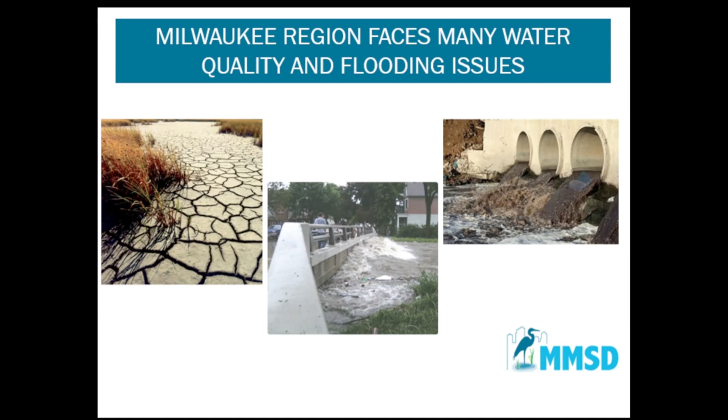Although we've done a lot in the last 20-something years, actually the last 100 years, we've got a lot to do still. We have droughts that we have to deal with. We've seen dry periods even here in the Wisconsin area. We have flooding. That middle picture is the Kinnickinnic River flooding. We're trying to address that now. And we have water quality issues that we all face every day, and actually we all cause. We're all a part of that problem. So we need to try to address that as a group.

So in 2009, when I was thinking about leaving the district, I wrote a vision. The left side of my brain is the integrated watershed management side of my brain. We're going to have zero overflow, zero homes in the 100-year floodplain. We're going to use green infrastructure to capture water where it falls, and we're going to try to establish green buffers along the waterways. Right side of my brain in 2009, I said, we're already seeing climate change.

We're seeing it a lot more now. So we're going to be mitigating and adapting as much as we can as a utility. We're going to go to 100% renewable energy. We're going to be 80% of that energy self-produced at the plants themselves. And we're going to use programs to try to sequester carbon.

Just this morning at 9 o'clock, I had a meeting where we're going to put in new blowers. I know this is real technical, new blowers at Jones Island. And we had different options to look at. We're going to install new blowers that will use 26% less energy than the ones operating today. And those blowers make up about a third of the power use at the district. So huge improvement just with one project.

We have to make improvements to the water reclamation facilities. I'm going to show you pictures of all these projects as we move forward and active projects going on right now. But you never see the work at the water reclamation facilities. They're inside a fence or a building and you never know what's going on. Flood management, green infrastructure, these are visible, these are out there.

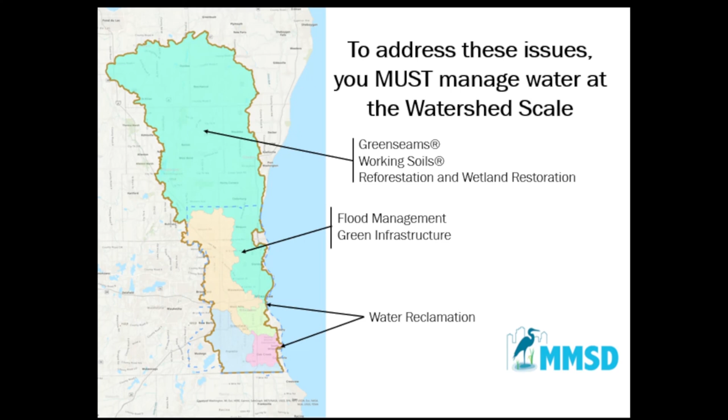And in the upper headwaters, we're working on programs called Greenseams, Working Soils, and a reforestation wetland program. And I'll talk about the Milwaukee Estuary project, which is an EPA project where we're building the largest structural piece. If you drive over the Hoan Bridge, you'll probably have seen the construction of a dredged material management facility. So we're going to go into detail on all of these projects.

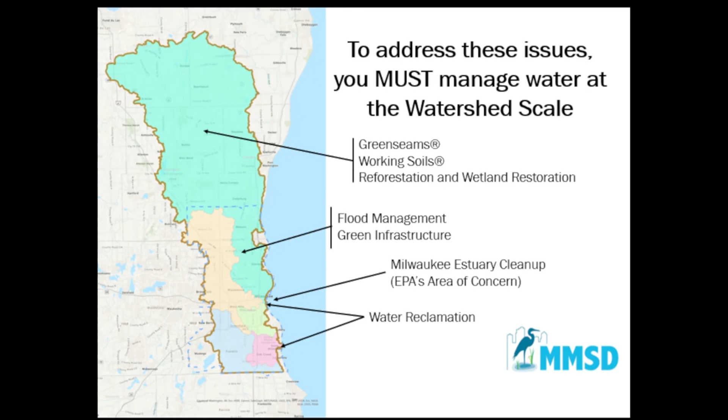But the key is it's all integrated. What happens in one community impacts another community. What happens upstream impacts downstream, downstream impacts upstream. And we have to use water as a uniter moving forward.

So here's the water reclamation facilities. Jones Island, in June of this year, will be operating 100 years. It started in 1925. Every day, 24 hours a day, treating wastewater. You heard about Guatemala and some of the concerns they're having with health issues because of polluted water. That was here 120 years ago. So we're very fortunate to have Jones Island operating that whole time period.

The other plant we have is in Oak Creek. That's the South Shore Water Reclamation Facility. On a normal day, these treatment plants are treating around 65 million gallons a day each, so normal day we're treating about 130 million gallons a day of wastewater. On a wet day, Jones Island goes up to 390 million gallons a day, so 65 to 390. South Shore goes from 65 to 300.

So when it's raining really hard and everyone's thinking of Kevin's face in front of a computer screen managing the flow, we're treating as much as we can at the treatment plants. And it's the normal treatment process for 90% of the country.

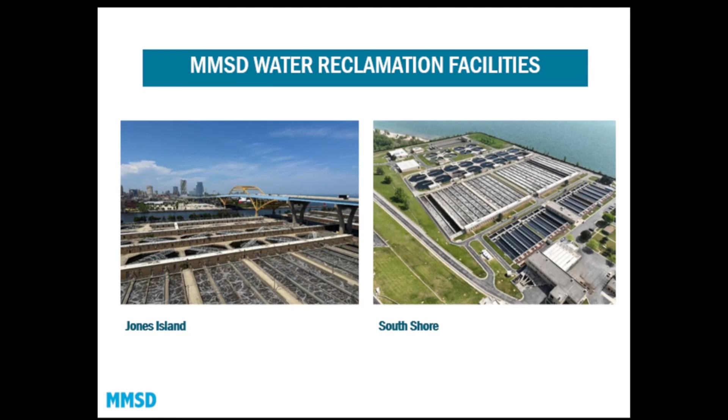One of the things that's not normal: since 1926, we've been producing a fertilizer out of our biosolids. We used to call biosolids sludge - not a real happy thing to talk about after lunch. We take biosolids, dewater them, dry them, heat them to a very high temperature. You can go to Lowe's, Menards, Ace Hardware, anywhere in the country, and buy Milorganite, Milwaukee Organic Nitrogen. We earn about $11 to $12 million a year on the sale of our biosolids. So it's not just good for the environment, it's very good for the environment, and it's good for the economy as well.

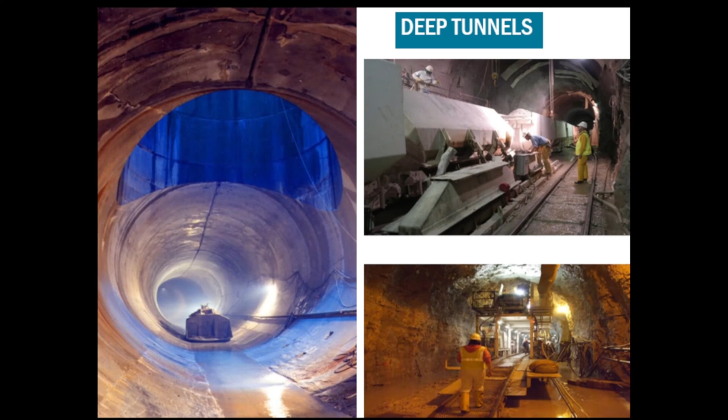1926 - I was not here, I did not think of that one. The deep tunnel: when I started, in my nightmares at the beginning, the deep tunnel was much maligned. It was thought of as being a problem as opposed to a cure.

The picture on the left is the original deep tunnel. It went online in August 1993. Since I've been here, we've added two segments to that tunnel: the Northwest Side Relief Sewer Tunnel and the 27th Street Tunnel - active, huge projects that are really helping us today. And here's what they've done.

We're required by the EPA to capture or clean 85% or greater of all the water that comes to our system, so we have to be better than 85%. In my world, that's a B, maybe a C. We're at 98.6 - in my world, that's an A. Even if my kids came home with 98.6, I'd be saying good job. These numbers really haven't changed that much over the years because we're seeing more rainfall now than we saw 25 years ago. But 25 years ago, the impression was totally different. So we're at 98.6, our goal is to be at 100%.

We're going to do that with green infrastructure. We're going to do that with improvements to the treatment process. And we're going to try to stay ahead of the changing climate. It's kind of like running up a hill where the hill keeps falling on you.

Talking about some of the projects, Green Seams is an effort we started - actually it started in 2000, I started in 2002 as the executive director. We are purchasing property along the waterways, property that has been flooded, property that should not be developed, because if it gets concrete or asphalt placed on it, that's going to force water downstream, flooding people out downstream. We have 5,515 acres purchased through the end of last year, and we estimate that that land captures about 3.1 billion gallons of water in the upper watershed - that's 3.1 billion gallons that is not coming downstream.

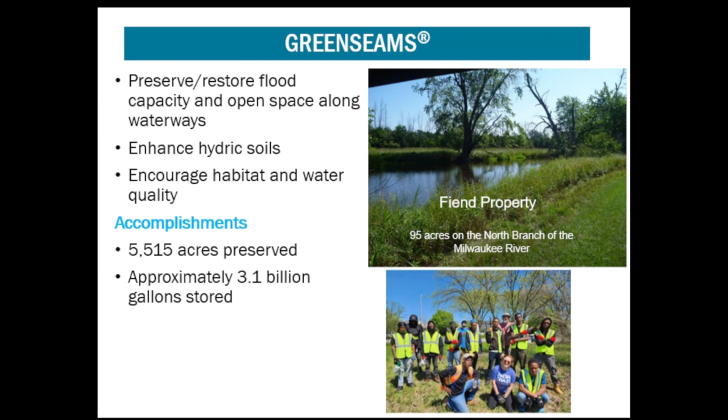The Fiend property is one that we closed on last year, so these are all active projects. And it's great to have that property hold back the water, but it's also a great way to train the future workforce on how to manage land - you can see that with that bottom picture.

Working soils - we're the dairy state. We need to work with agriculture, and a majority of the Milwaukee watershed is agriculture. So we partnered with the USDA and the NRCS, and we are working with farmers, buying easements for their farms, helping them manage the runoff and the pollutants from their farms better. To date we've got almost 1,700 acres of land in the Working Soils Program, 840 million gallons of capture. And in October, USDA gave us a $19.8 million grant, not a loan, a grant for this program. They've recognized the Milwaukee MMSD Working Soils Program as a national lead, and you might have heard the Secretary of the USDA on the radio around the end of October.

In 2020, I had this idea - I have a bucket list before I leave - and I said we need to reforest the watershed. So what we're doing is planting 6 million trees, restoring 4,000 acres of wetlands, because that will capture water that will not flow downstream.

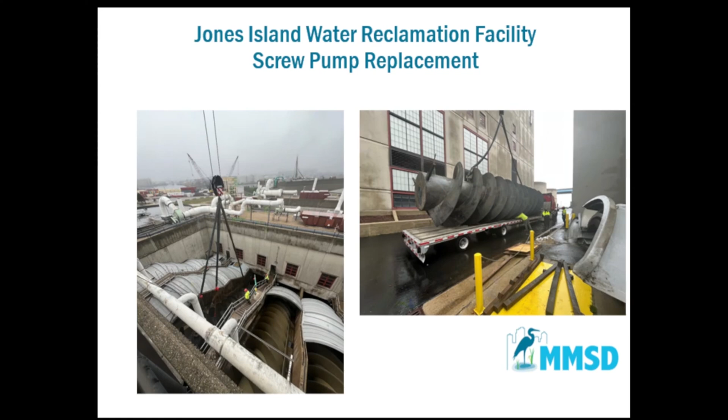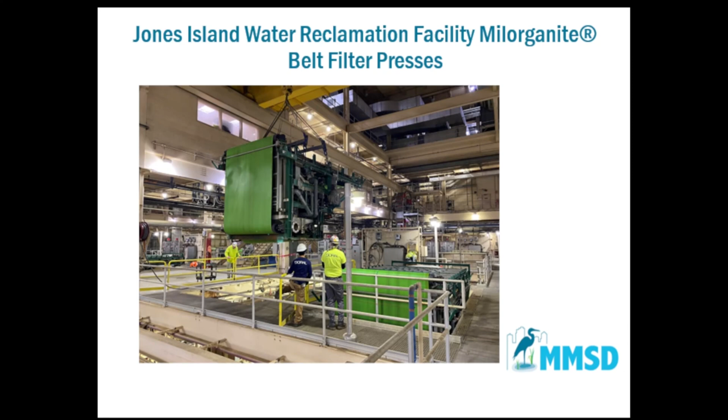When we make Milorganite, we have to dewater that Milorganite. So these are belt filter presses that dewater that material before we put it in the dryers to make Milorganite. Huge number of jobs within the water reclamation facilities that people don't even see, unless you're a contractor, and then you see it.

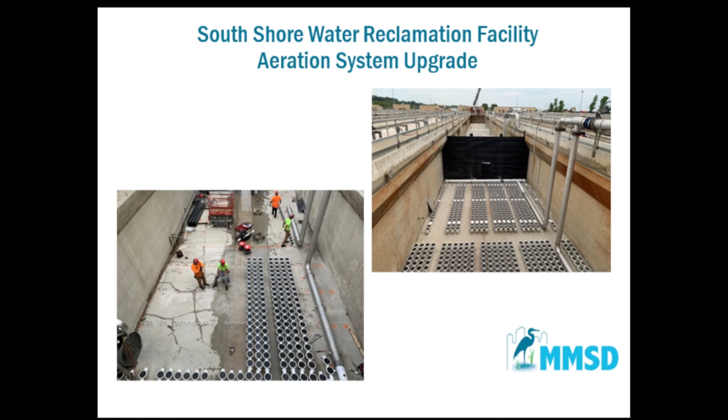South Shore, we've got a $73 million project ongoing right now to replace the aeration system in the plant. So this is like trying to make a repair on a jet when you're flying the jet. How do you do that and keep the plant running and make the improvements at the same time? We have to take certain parts of the plant out. We have people working there through the year. It's a wonderful project.

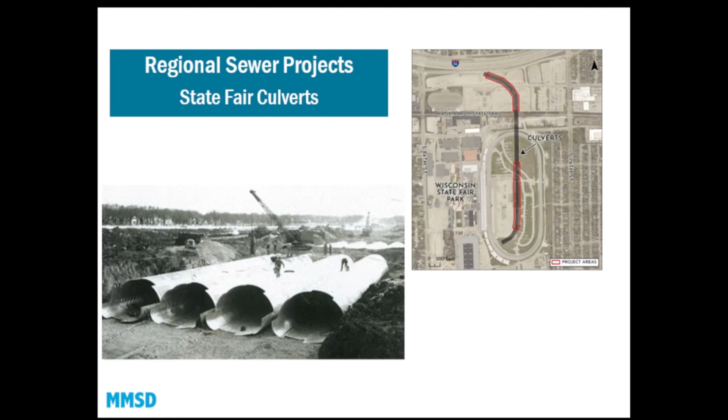And how many people knew that Honey Creek flows underneath State Fair Park? Oh, there's some names. Okay, Chris knew. I think that picture was taken the year I was born, the bottom left. But we've noticed over the last year or so some sinkholes occurring in the infield area of the track. So what we're doing this year and next year is we're going in and putting a structural liner on the inside of those culverts, and that'll add about 20 years of life.

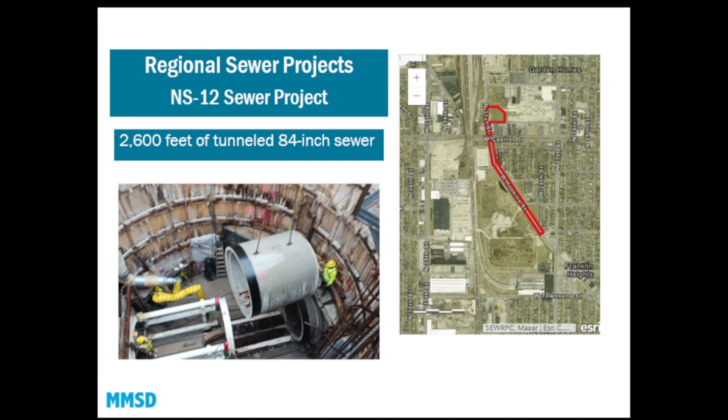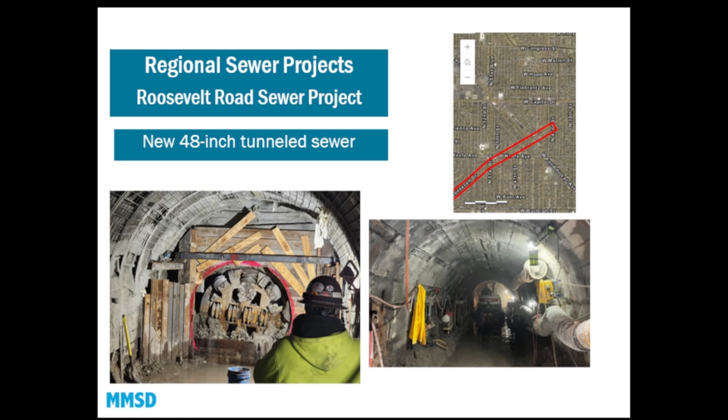I mean, you can't get better than that. You're managing stormwater, improving water quality, and improving the future.

And then I was thinking, boy, we got a lot of highways that are elevated. They're really great for capturing water, but that water comes down a pipe, that pipe sends it to the river, or that pipe sends it into a sewer, full of pollution or way too much water too fast. So we started the Green Highways program at DOT, Wisconsin DOT, and in these cases, the city of Milwaukee have been phenomenal partners. We work with the DOT to build these. Once we build them, the city maintains them. The Becher Underpass was just completed last summer, and it's managing water off the interstates, reducing all those little pieces of rubber off our tires and all that other pollution that comes from our cars, reducing that load to the rivers.

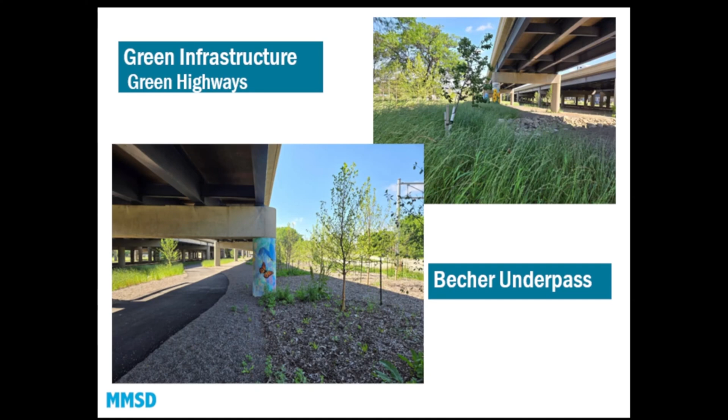And as I was walking in here today, I wish I'd had a picture. The parking lot here, if you want to see green infrastructure, there's porous pavers in the parking lot today. There's also bioswales out there. I'd forgotten that we did this project also. So you'll see it everywhere, but you don't even think about it really. And that's the goal.

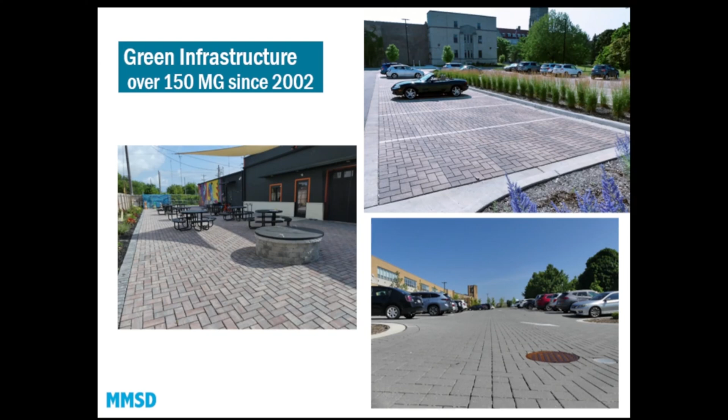It blocks the passage of fish upstream. This is 100% paid for by the federal government. We were the instrument they used to build it, so we contracted design and construction. It was completed a year ago in December. And now you see that little river going around the dam. That's a fish passage, and we've got people upstream reporting huge fish that they never saw in the Milwaukee River that are going through the fish passage.

What's that have to do with MMSD? Well, it's better water quality for everyone, better habitat, and we didn't pay for it. The feds paid for it.

The other big project are the two that you see. If you're driving over the Hoan Bridge, we call it the Dredge Material Management Facility, DMMF, great acronym. EPA has identified about 43 areas around the Great Lakes that are heavily polluted. They identified the Milwaukee estuary as one of those 43. So MMSD is building a $120 million storage facility.

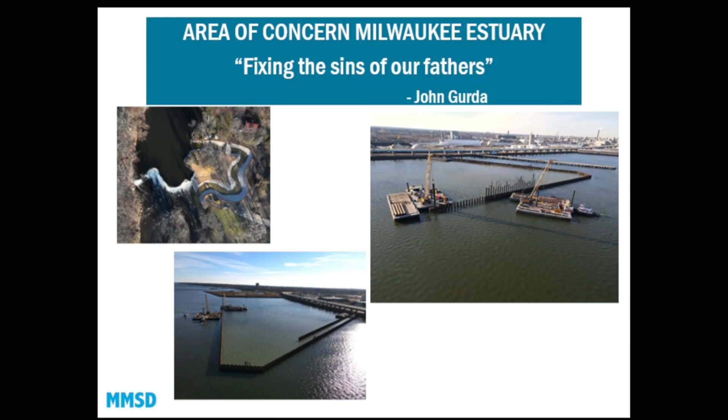This one almost didn't happen, but it did. We got it there. Has anyone seen it driving over the Hoan? Yeah, if you look off to the left towards the lake, you'll see it. We also do flood management.

This is the Menomonee River, on the west side of Milwaukee near Wauwatosa. We are redoing the river right now. It's a flood funnel, so it causes flooding upstream. We're working to remove the concrete in that area, naturalize it, and make it more of a green corridor going through.

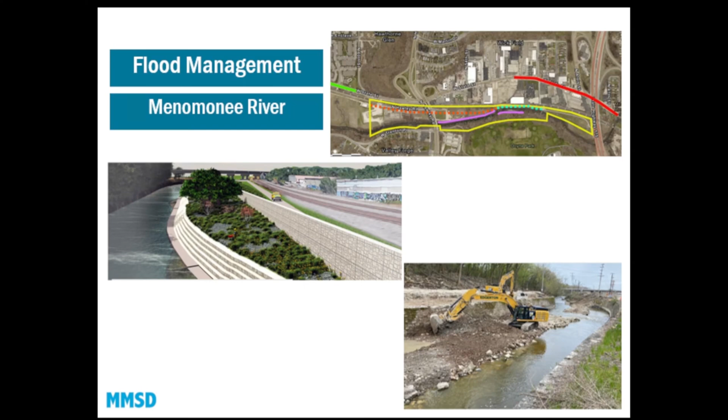This is in one of the lowest income, most degraded environmental areas in the city. What we're doing is building, I think it's a 45-acre basin in that area. So it's going to be this huge green space.

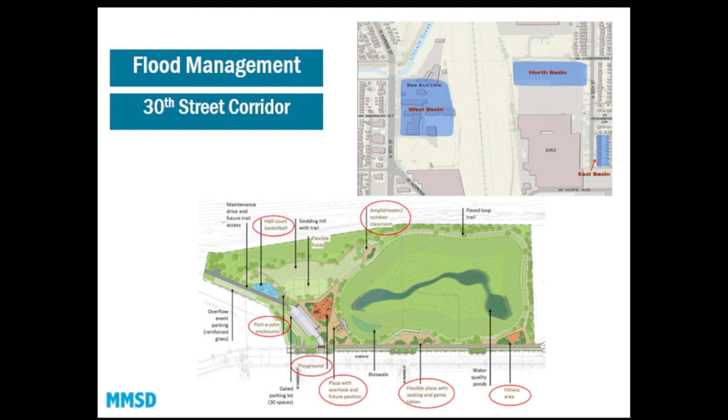So we already recover water, we store it, and then we drink it again. We are drinking this water again, if you don't know that. We already recover biosolids, making fertilizer out of it and selling $11 million worth throughout the country every year. But can we also tap the heat of that wastewater and use it to produce energy?

Can we do something with all the meds that people have in their bodies that go through the system and end up going to the lakes? This is the technology that we're looking at, trying to be more precise on resource recovery.

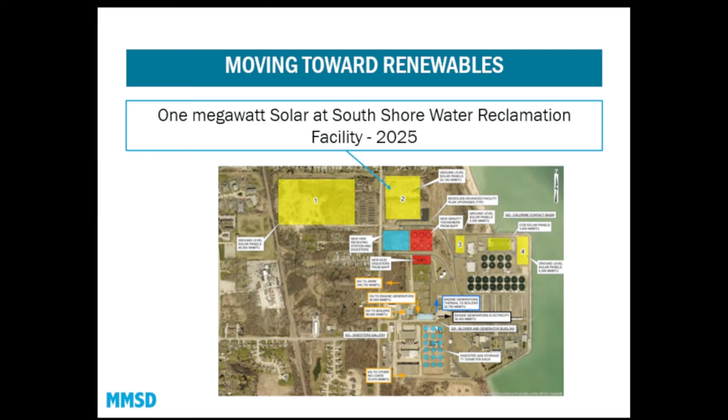It's not a legacy we asked for. It's not a problem we caused, but here it is anyway. And with that problem comes a great opportunity. Ours can be the first generation in Milwaukee's history to leave our rivers in better shape than we found them, for all the generations still to come. Thank you.

So this is the dream that I dreamed 20-something years ago to try to get us to this point. Again, many nightmares in the middle of all that sleeping, but we're here, and I think we've done a great job, and it's due to all of you. So if there's questions, I'll be happy to take some.